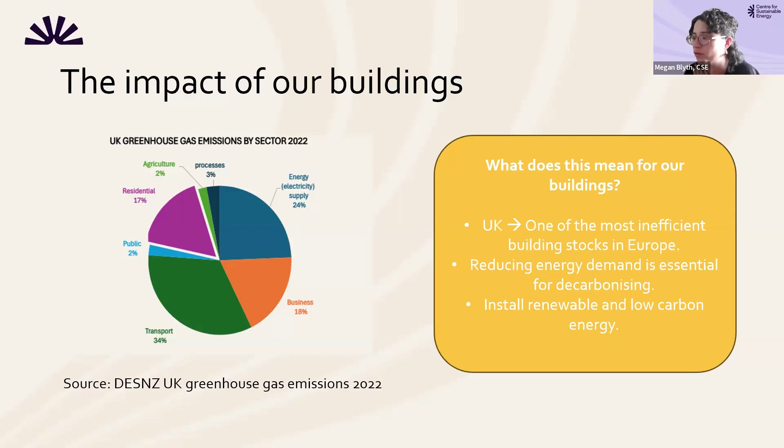Currently, we have one of the most inefficient building stocks in Europe. This means our buildings are wasting a lot of energy. So to support the UK's decarbonisation efforts and reduce our greenhouse gas emissions, we must improve our existing buildings to reduce overall energy demand. At the same time, we also need to move away from fossil fuels and install technologies that provide low carbon or renewable forms of heating and electricity.

But, really importantly, it's not all about carbon - there are many co-benefits of doing this work, such as providing cleaner air, cheaper bills, and comfortable buildings for the users of our buildings, but also for staff and volunteers. And really importantly, there's the reduced running costs it could have for community buildings, helping them fund those crucial activities for local communities.

So why are community buildings so important, and why do we at CSE do a lot of work with community buildings? As we know, because we speak to communities all the time, there is an appetite to respond to the climate crisis, but also to ensure that we're doing this in a fair way and supporting people that are struggling in the cost of living crisis.

Community buildings offer essential local services, many of which you'll be supporting yourselves coming here today, but things like food banks and warm hubs and key community activities.

We're also seeing increasingly that community spaces are acting as places of refuge during climate impacts. You know, if there are local floods or cold snaps, they might act as warm hubs and things like that. We can also see that community organisations that take action on their buildings can often find this to be a gateway to other community action on energy and climate change, empowering communities to do something in their local area.

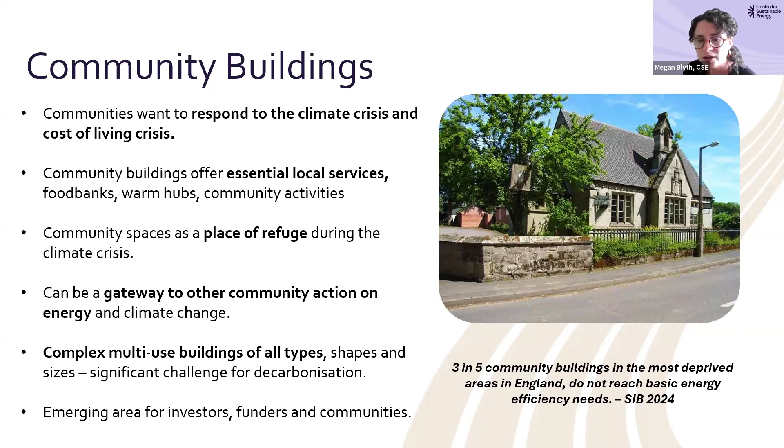Before we run through the options for community buildings, I wanted to go through some of the key terms that exist in this space to clarify what they mean.

So first of all is retrofit, because you'll hear this term a fair amount. This is about any improvement work on an existing building to improve its energy efficiency, making them healthier to live in and easier to heat, able to retain that heat for longer, and replacing fossil fuels with clean, renewable energy. It matters because, as we've just discussed, we're facing the two major challenges of soaring energy costs and the urgent need to cut our carbon emissions. Retrofitting our existing buildings is a crucial solution for both of these issues.

So we also know that we need to make sure our new builds are energy efficient, and that's definitely important. But we have so many existing buildings, old, not so old, across the country, and we need to make sure we are addressing those.

So a few key principles to bear in mind when you're thinking about retrofit. First of all is to do no harm. This means not jumping in to add things to your building before you understand how it works. It also means removing things that may be causing issues before making additions.

The next one is repair and maintenance, and we'll come back to this a lot in today's presentation. This is a really important thing to consider, simply maintaining your building as a key way to start to increase both thermal comfort and the fuel efficiency of the building. It allows the building to work as effectively as possible. A properly maintained building could save up to 40% in energy consumption.

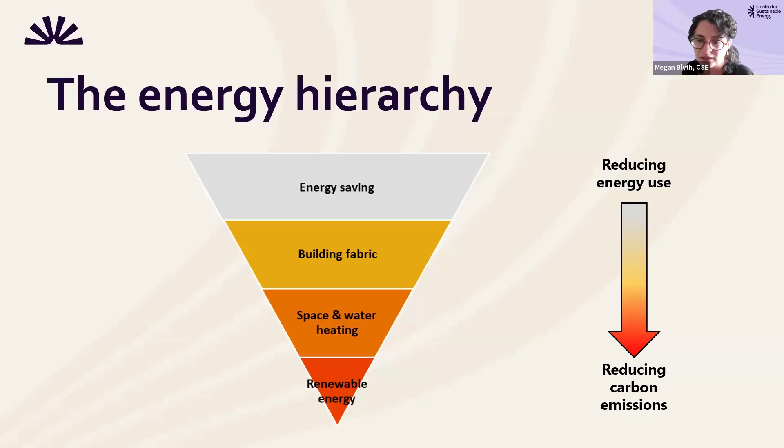So we're going to run through a few options and things to consider for community buildings specifically. The first step is to build a picture of your building and understand what your starting point is. We've worked with community buildings for many years, and often you have building managers who come and go, and there's very little understanding of how the building has actually been used over time, how that's changed, and any history of works that's happened. So it's good to compile that information and start understanding where your starting point is.

A few questions you could ask: how is the building being used, when and where does it feel comfortable or uncomfortable. Engaging users of the building in that process can be helpful because they might have feedback you're unaware of. So if you're renting out spaces to community groups, for yoga or baby groups, get their feedback on the comfortableness of that room.

Then it's what is the condition of the building, and are there any repair issues, and if there's any history of works having been done. This is important because if you're doing any major new installations like insulation, contractors will probably want to know what's happened before to make sure they're using the right materials and not putting anything on existing works that might have previous issues.

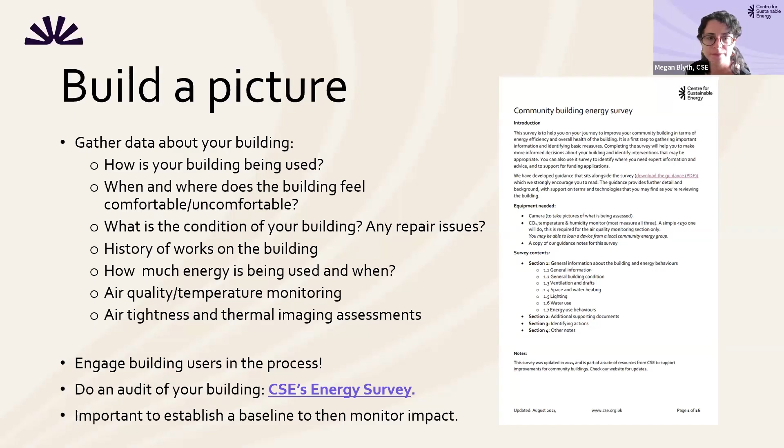Maintenance first - we've mentioned this before and we'll mention it many times because it's really important, and something that's often not made important in the funding world. Often you can get grants for things like solar panels, a new heat pump, or insulation, but it's a bit harder to get funding for repair and maintenance. We're really advocating for the importance of that, and this is key - most, if not all, buildings will have defects, including new ones.

Identifying and understanding the underlying causes of issues in a building is vital before considering improvement works. This is really important because it can help retain the value of the building, and minor repairs cost little, but if left unchecked can end up costing a lot more. We're also seeing increased impacts of climate change and the strain that has on buildings, particularly those exposed to wind and rain.

It's important because you have a duty of care to ensure the environment is safe for the users of the building. It also helps preserve the building for many years to come, which is really important if you want the asset to continue delivering those crucial services into the future.

Problems with the fabric, such as cracks or things that allow moisture to come in, can cause damp and mold issues, which can be unhealthy for the air quality and for the users of the building. It can also lead to more heat loss from damp, cold surfaces, which in turn increases heating costs. So dealing with that is really important.

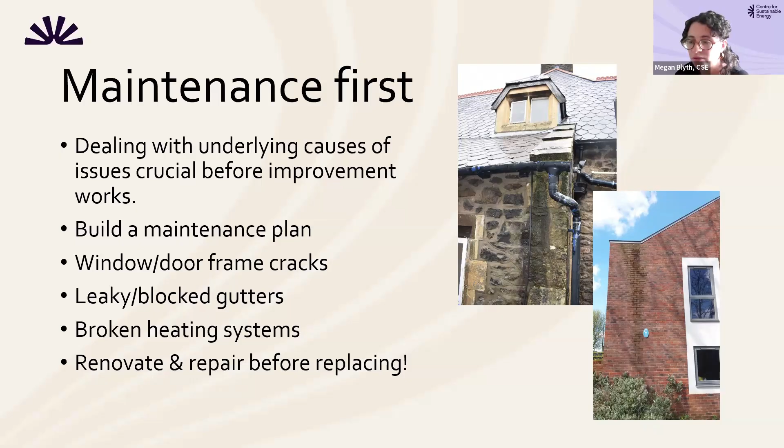The next step to think about is low-cost behavior change or simple measures you can do. These are generally really good to get you started and can make a difference. They're also good because they're easy wins, keeping that momentum going before you start thinking about those larger, more scary measures that you need to fund.

Things like draft-proofing, efficient lighting, putting up signage for building users so they understand how to reduce energy use, understanding heating controls, and fitting things like heavy curtains and shutters can all be good options.

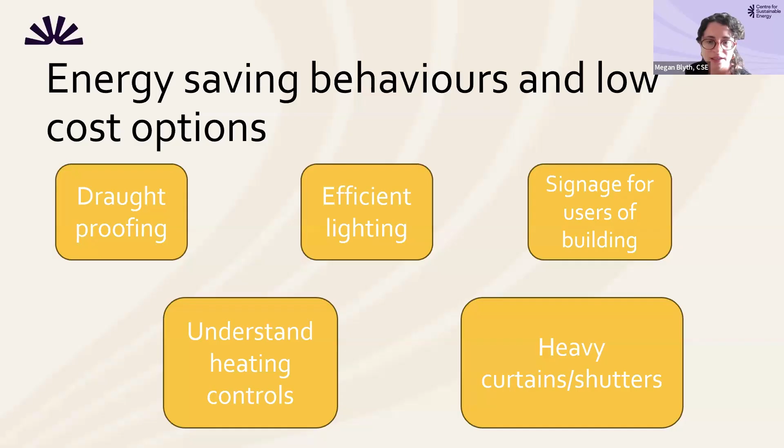Once you've looked at those steps, you might think about addressing the fabric of the building through insulation. This can really have a big impact on heat loss. The appropriate options will really depend on your building type, the materials being used, geographic location and exposure. So it's crucial to understand that the viability of insulation and which materials will work really depends on those factors.

It's really important to ensure a balance between having enough insulation, but also enough ventilation so that moisture does not build up and cause any damp issues. Generally, continuous insulation is better. You want to avoid having gaps in the insulation.

So it's a good idea, if you're thinking about insulation for your building, to survey the condition of the surface before. If you've got any repair that's needed, any damp issues, you really don't want to be installing insulation on any damp surfaces because you're essentially going to be trapping that moisture and causing fabric problems.

And if you are in a conservation area or a historic building, a heritage building, you'll probably have traditional materials being used that are particular for that area. It's good to make sure that any kind of insulation works takes that into account and uses appropriate materials. You don't want to be plonking modern materials on traditional materials.

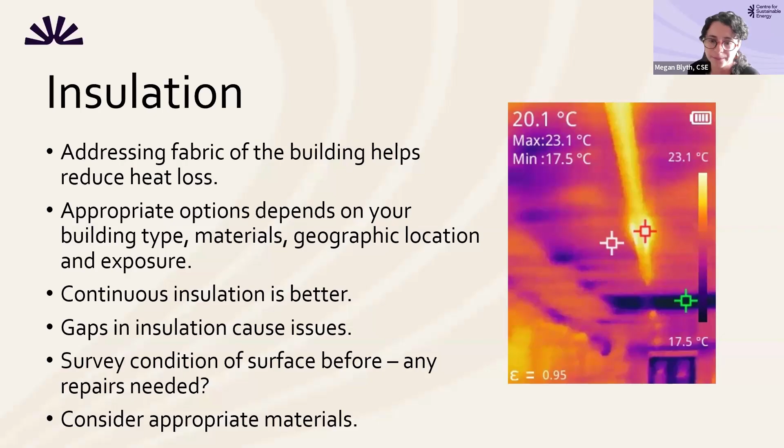Ventilation is really important and should be considered as part of any retrofit work. It's important, particularly when you're modifying the fabric of the building, for things like moisture management and the health of the indoor air. Fundamentally, you want to decrease the level of unwanted moisture coming in through drafts, for example leaky roofs or poorly fitted or old windows and doors, and increase the amount of moisture that you're deliberately ventilating out to a level that suits the building's demands.

So this is especially important in community spaces where lots of people gather and exercise indoors. Any kind of exercise classes, yoga and things like that, build up quite a lot of moisture. So you want to make sure that you're ventilating that out.

Ventilation could be a simple matter of just opening the windows, so natural ventilation. Or you might think about installing things like extractor fans, trickle vents in windows. You might want to consider, especially if you're thinking about replacing your heating system, something called a mechanical ventilation with heat recovery system, or MVHR. Not going to go into a huge amount of detail on that, but there's lots of information about it on our website if you are interested.

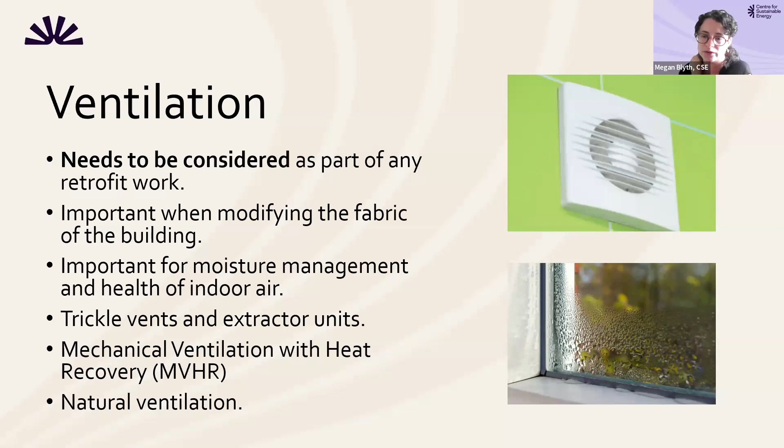And that's just a way to have that ventilation system more embedded in the building, as well as provide some heat. So this is just really important to consider as part of any project where you're improving the building, just to make sure that you're providing healthy air for the users.

So then heating and hot water systems, there's lots of different options available for community buildings. You probably are starting to hear a lot more about heat pumps. This is a low carbon form of heating. There's different types. You can get some that connect to wet central heating systems as you would have a gas boiler, but you can also get ones that connect to dry heating, through vents, and they can double up as aircon in the summer. So that might be an option if you've got a smaller space and you deal with a lot of overheating in the summer.

Direct electric heating, like infrared heaters, are something we see a lot of in community buildings, and they can be really helpful if you've got a really large space or a space used for multiple uses. So things like sports halls, churches, large high spaces, as this provides more direct heat, so you don't have to heat the whole space.

We also see in community buildings things like air curtains, like the picture at the bottom there, that provides heat above doorways. That's definitely an approach that might be appropriate, particularly if you've got a building where people are coming and going quite a lot. Modern storage heaters as well can be really efficient heating types nowadays.

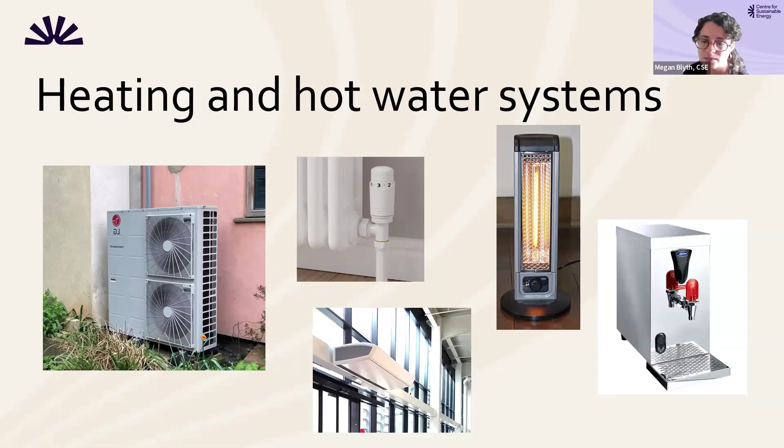Community buildings that we work with tend to not really need a lot of stored water, so things like instant water heaters may be appropriate for those types of buildings.

With any heating system, it's really crucial to understand what you already have and how it works, and make sure it's set up in a way that's suitable for your needs and the multiple needs of the people using your community building. Make sure that somebody knows how to use it.

If you've got a relatively simple setup, but one that requires controls to be changed throughout the day, it's a good idea to make sure multiple people know how to use those, so that you haven't got people changing the controls that they shouldn't, or constantly trying to find that one person to help them.

However, if you do have a really complex, automated system, it's important to make sure that you've got one person who has that expertise.

If you have a gas boiler, it's important to get that serviced regularly. Any heating system should be serviced regularly to make sure it's performing well. Generally, if you're able to avoid too many or overcomplicated controls, it's probably a good idea, and make sure your heating actually matches when you need it.

There's a lot of buildings where we see the heating coming on when no one's in there, and that's just using a lot of energy and wasting it, and costing a lot of money. With heating, I think it's a good idea to get bespoke advice from a heating engineer, particularly if you've got a really complicated building, or you're looking to install a whole new system.

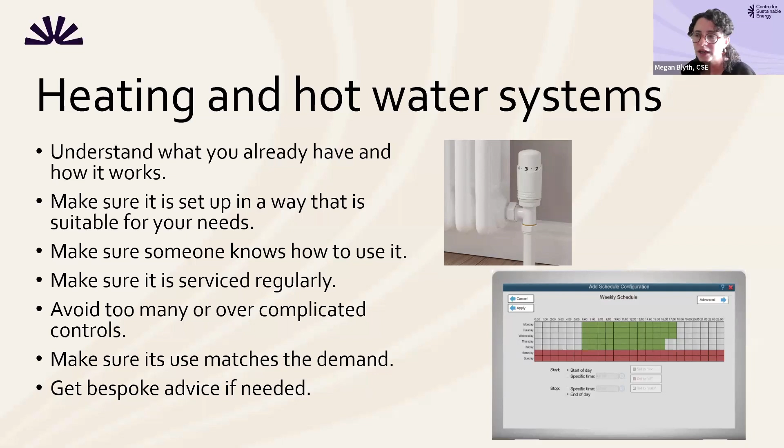And finally is renewable energy, which is the tip of the energy hierarchy. As we've mentioned before, it's a really good idea to reduce energy use first, then increase the building's efficiency through repairs, maintenance, and fabric measures before considering renewables. But it's a great idea to consider renewables because they can really help reduce your carbon footprint, and also help reduce your running costs.

Solar PV is very common and a good way for community buildings to reduce their running costs, as it stops them relying on expensive electricity from the grid, particularly if the building is used mostly in the daytime. Combined with a heat pump as well, that can work really well to reduce the carbon footprint of the building.

Solar thermal is something we also see, and it's less common in community buildings because it's more for organizations that require significant hot water usage, but it does exist, and we do have information about solar thermal on our website if you're interested. For any solar project, you'll need to consider any planning restrictions, particularly if your building is in a conservation area or if it's a listed building.

You'll also need to have a suitable roof. If you get a survey done, a contractor will look at your roof in terms of its condition for fitting the panels, and also its exposure to sunlight, to make sure it's getting enough sunlight to generate what you need to power your building.

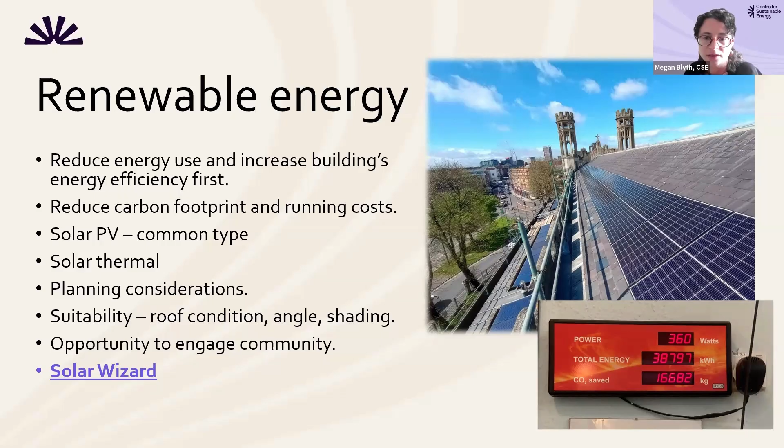If you already have solar panels, fantastic, that's great news. Hopefully they're working for you. Here's a few tips to make the most out of your solar panels. It's generally a good rule of thumb to use as much of that electricity as you can on site, than selling to the grid.

So those who have solar panels will probably know, or those who are thinking about getting them, that you can sell your electricity back to the grid, and you get something called the Smart Export Guarantee that pays you for that. But what you get paid for it is not that generous compared to the savings you can make using your electricity generated from the solar panels instead of paying for grid electricity.

So something to bear in mind is making sure that, where possible, you're using that electricity. Things like using appliances in the day. It's good because community buildings do tend to operate a lot in the daytime, so they're good buildings to have solar panels.

If you feel like there is some excess electricity that's being generated, you might consider getting something called a solar diverter, which can turn it into hot water, which can then go into a heating system or be used as hot water in the building.

If you are generating a lot more than you use, you could explore getting a battery, as this could provide electricity when the sun isn't shining, or backup power if you're in an area that has a lot of grid outages.

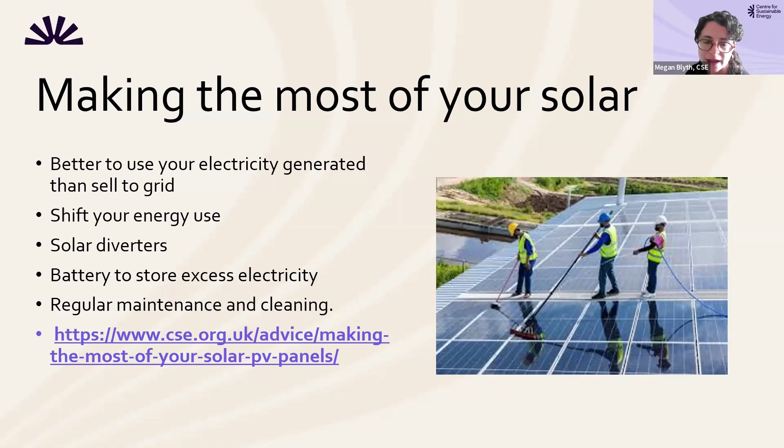Finally, before I hand over to Tom, I just wanted to cover a bit on finding support and funding. In terms of finding a contractor, we get a lot of questions from community buildings around this. Particularly if you are an older, traditional building, it's really important to make sure the contractor has the appropriate skills and experience needed.

Definitely ask around locally for recommendations. You could also look into searching national registers for accredited contractors for the particular work you're looking for. When you do find some contractors, look at other jobs they have completed. It's a good idea if they've worked with community buildings similar to yours, and ask about what kind of training and qualifications they have.

The Microgeneration Certification Scheme is a bit of a mouthful, but it's really useful because they are the certification body for low carbon energy technologies and contractors. So if you're thinking about installing a heat pump or solar project, it's a good idea to take a look at their installers. If you're interested in information, advice and support, or finding a heating engineer trained in heat pumps, HeatGeek is a good source for that too.

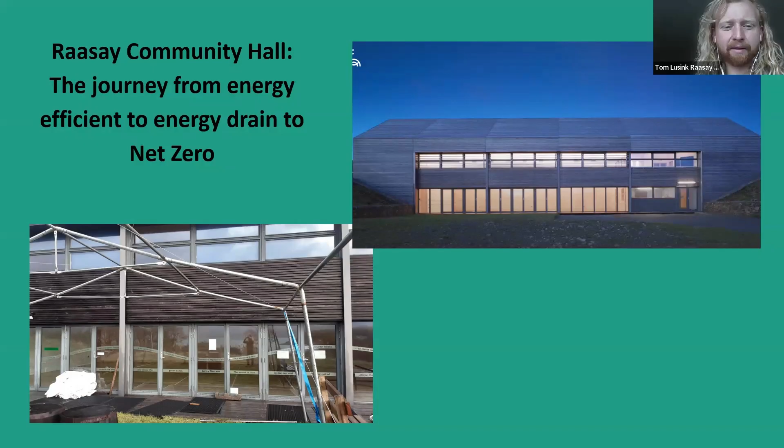And this was at a time when we were just recovering from COVID as well. As many of you know, it's run by a volunteer board whose capacity just didn't have the capacity to deal with this. Can we go to the next slide please, Megan?

Thank you. So as part of the project, we decided the building would be one of our first action points. The building had become a burden to the community, and so we thought we'll fix it. But in doing so, it was part of our philosophy to make sure it doesn't become a burden again and will give back more than it took. So we want to make it as efficient as possible to reduce its carbon footprint while being as affordable as possible, which goes hand in hand.

So we wanted to fix the heating system, replace the leaking doors, and install a renewable source to power the electrical heating system.

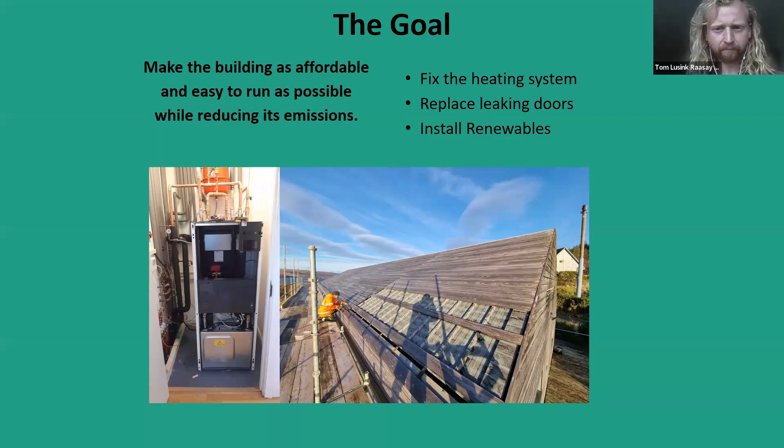Next slide please. So how we went about it - yeah, it didn't go to plan, you'd be disappointed if it did. A lot of things changed along the way.

This started in July 2023, and our first port of call was to repair the heat pump. This proved to be extremely challenging, as the funding and suppliers both wanted to replace and not repair, although this went against the whole ethos of what we were trying to do. So after quite a lot of perseverance, we found the money and we found the contractor to repair the ground source heat pump that was already installed.

The following February, again following much searching and learning a lot more than I ever could have dreamed of about the requirements for sports hall doors, we had shiny new bulletproof grade glass doors installed to keep the wind and the water out and the footballs and basketballs in.

While this was going on, we were working with CARES funding to fund a renewable installation on the roof, namely a solar PV.

Initially, it was extremely challenging to get a supplier to quote for us, even one quote, given our location. So against usual good practice, initially we were only able to get one quote. As time elapsed and the funding application finally came through, we renewed the quote, and by this stage I think the supplier had second thoughts about working on Raasay and essentially priced us out. This put the whole project in jeopardy, as we only had a couple of months to use this funding before it would expire.

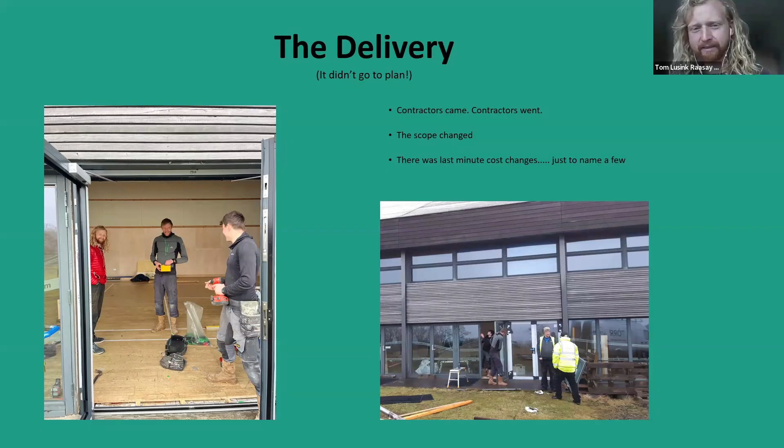So where are we now? Well, the building is now net zero - it consumes less energy in a year than it produces. That's a huge win, and that also translates to huge energy savings. Like Megan said, you're much better off trying to use it than sell it, because you get peanuts for selling it.

So we're looking to maximize that and install an EV charger. There have been some teething issues, though so far there's been good aftercare from the solar company. However, I do have concerns about this going forward, because what happens if and when they go bust?

So on top of all these savings, the building is now also energy independent - it can run independently from the grid. So in a power cut, which is not that rare for us, the building is actually now our resilience hub, and can basically keep people warm and supply everything we need. So really, it's gone from a decrepit energy black hole back to the thriving community hub it once was.

So very quickly, ending on key lessons - what did we learn?

Firstly, I'd say the question is, where do we need to outsource skills? What skills do we not have, and what do we need to find out? We early on identified that we had an unusual roof design. We got involved with a structural engineer, and this proved invaluable. It cost us a few hundred in the short run, but in the long run probably saved us thousands. And those skills might exist in your community.

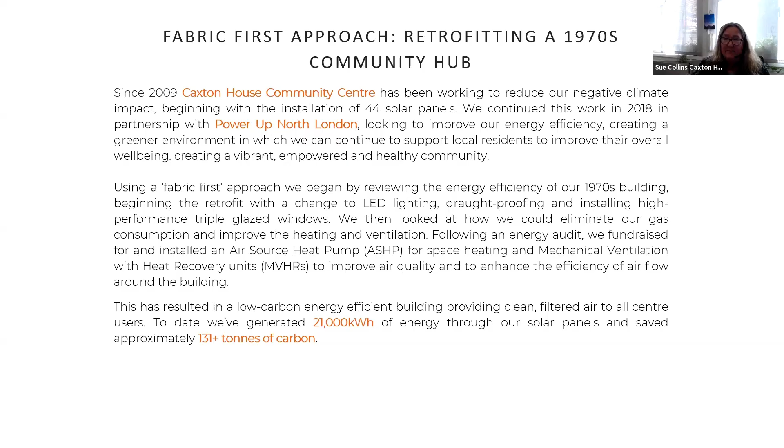As long as you're keeping in contact with them, you can usually change things around as you need to. So since then, we have been monitoring our decarbonisation timeline. I think the next slide might be our timeline.

After the installation of the air source heat pump and the MVHRs, we wanted to work on changing the behaviour in the building. We have 6 other groups that we rent office space to, and some of them plug in electric radiators. It was really important that we've been working with them throughout the process, but we also wanted to encourage a change in behaviour, so that the groups in the building are much more aware of what we're trying to do, why we're trying to do it, and how they can support and buy into all of that. We have a massive display in our reception that people can come and read and ask questions about.

When we installed the air source heat pump, we didn't take into consideration our large sports hall. That was because it's got very high ceilings, and it would have meant that instead of installing a 50 kilowatt heat pump, we would have had to install a 72 kilowatt heat pump, which would have been incredibly expensive. So we decided that we would find an alternative heating solution for the main hall.

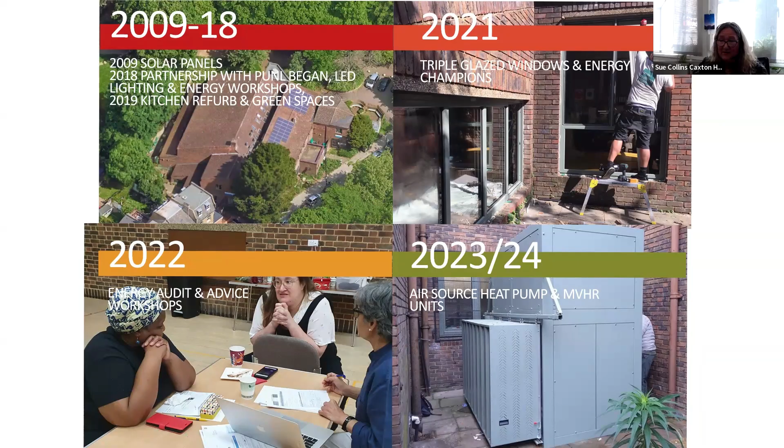What else? You'll see there's a monster of a beast on the bottom right of the acoustic unit that had to go over the actual pump. And you'll see from the top left where our solar panels are on the front roof, we'll move those to the back roof and install new ones.

If we go to the next slide, we started off in 2018. Our carbon timeline was 44 tonnes, and the last measurement we did at the end of 2024, we were under 8 tonnes of carbon. So we've made significant savings, and we hope to improve on that with the new plans we have, funding permitting, to carry on with this work.

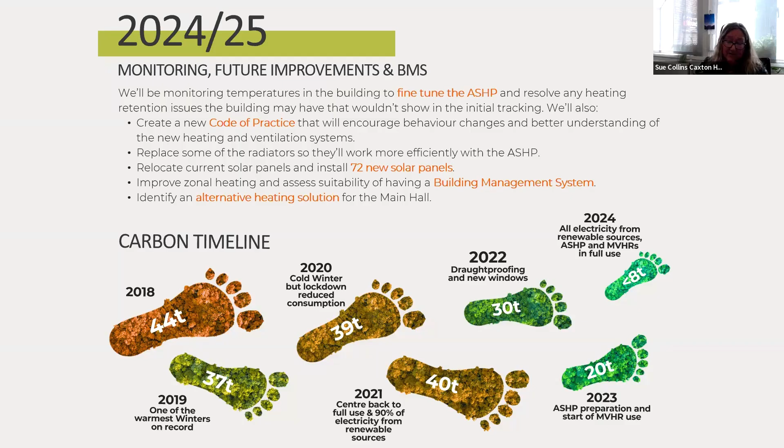We did put together a lessons learnt document, because we work with a lot of other community centres and voluntary groups who run their own buildings, and this is just a summary of the lessons learned. There's a larger document, but there were some really important things we found. I hadn't factored into the funding somebody to run the project, for example, so I did all of that along with support from Power Up North London.

I've already mentioned local planning rules, and making sure the people you bring in - we had a lot of support through Power Up North London, from pro bono work for the funding, the planning application and the acoustic reports we needed. A lot of energy groups will have pro bono support you can tap into, so get in touch with your local energy groups, because they'll be able to help in a lot of ways. My knowledge before I started working with Power Up North London was negligible, so it's been quite a learning curve.

And obviously, if you have any questions, I'm happy to answer once we get to Q&A. I think I've gone over - I try and keep it short, but it never is.

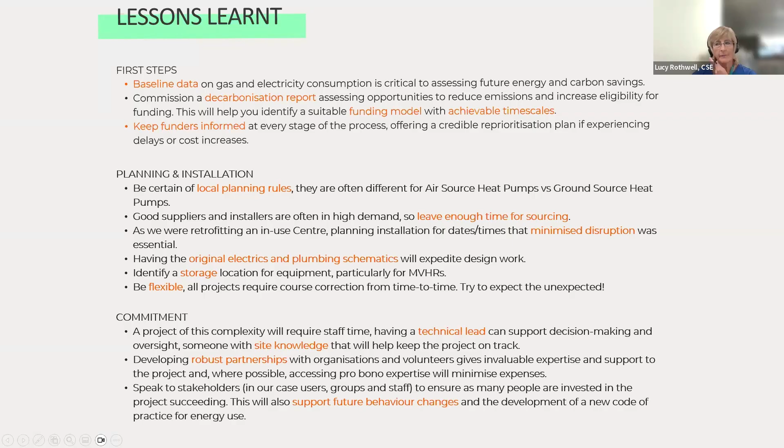Too many questions, a few comments from people as well, helpful advice and stuff. Earlier on, Martin Carr was asking about solar panels and wondering whether they're self-cleaning when it rains. I think that's probably a level of technical knowledge about solar panels I don't know - maybe Tom or Sue would, and maybe there are some types that are. For us, we have an advanced self-cleaning system, in the form of it being very windy here, and I've seen so far they look like they've been getting pretty clean just from vigorous wind and rain. But we will be planning - they're not self-cleaning as such, so there'll have to be a cleaning protocol if that isn't up to scratch. Ours are definitely not self-cleaning, but I have no idea whether the new ones might be, so that's definitely something I'd want to look into too. It's a good idea, once you start looking at contractors, to ask what types of panels they offer and what the options are.